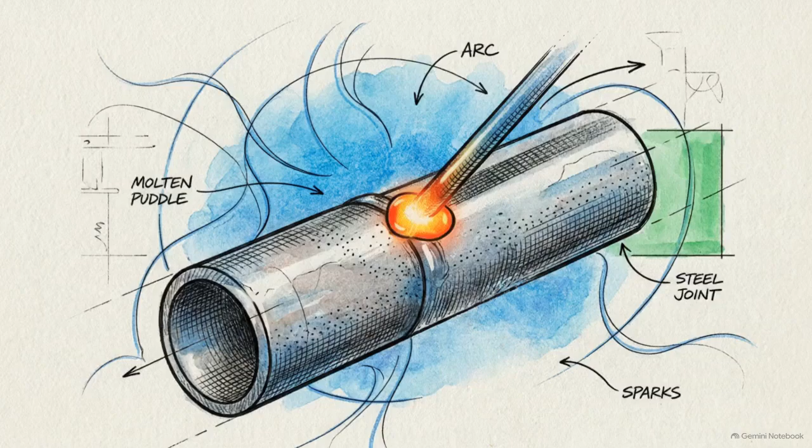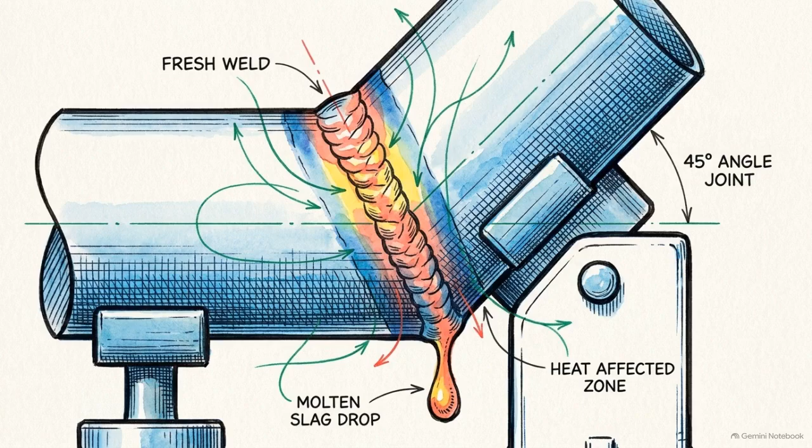In pressure pipe welding, an electric arc reaches temperatures exceeding 6,000 degrees to fuse steel. Maintaining a sound molten puddle against the pull of gravity is the primary test of a welder's skill. To prove this proficiency, welders aim for a specific industry benchmark, passing the 6G qualification test.

Consider a common case study. A welder passes a performance test using the shielded metal arc welding process on a 2-inch Schedule 80 pipe made of ASTM A53 carbon steel, fixed at a 45-degree angle. Once the test is complete, we have to determine exactly what this individual is legally permitted to weld on the production floor under ASME Section 9.

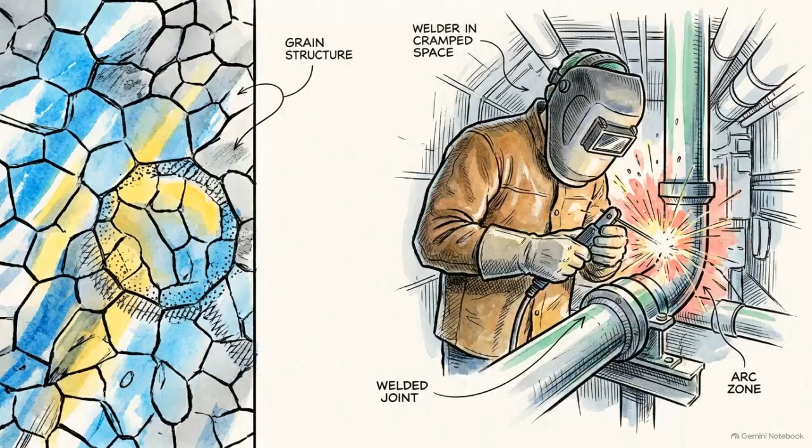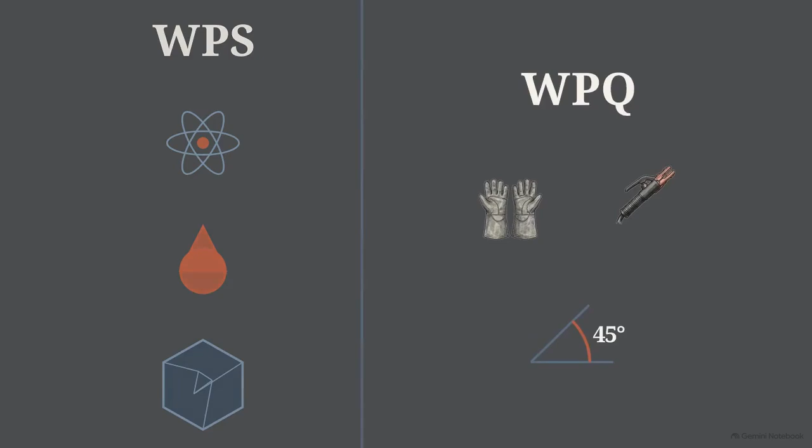This requires a distinction between testing a procedure and testing a person. A welding procedure specification, or WPS, qualifies the chemistry, heat input, and metallurgical viability of the joint. A welder performance qualification, or WPQ, is different. It strictly evaluates the human's physical ability to deposit sound metal within defined geometric constraints.

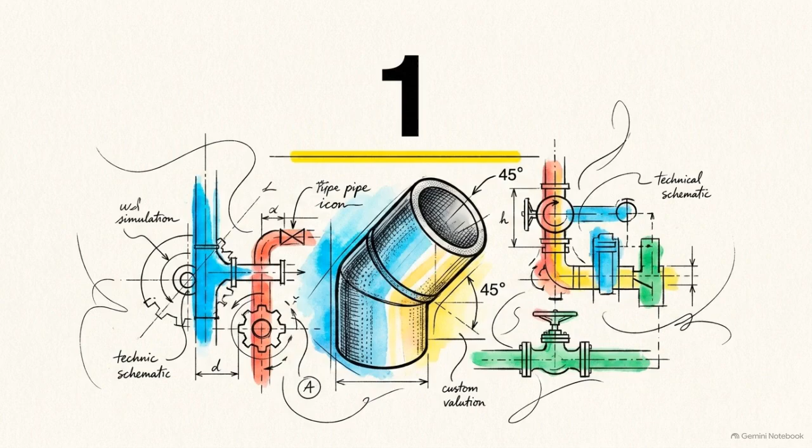Section 9 uses the physical parameters of that single test coupon to calculate a definitive boundary for the welder's production limits. The first parameter to evaluate is the 6G position. This orientation is physically demanding because it requires the welder to transition through flat, vertical, and overhead techniques in a single continuous pass. Paragraph D of the code defines the 6G position as a pipe fixed with its axis inclined at 45 degrees, where the weld is deposited as the welder moves around the circumference.

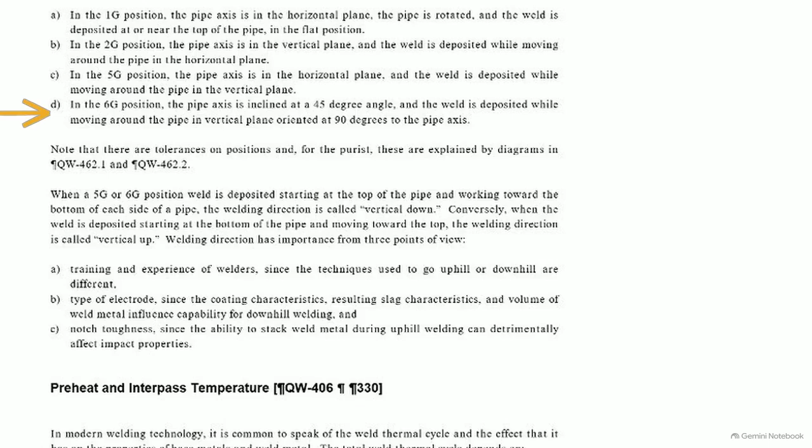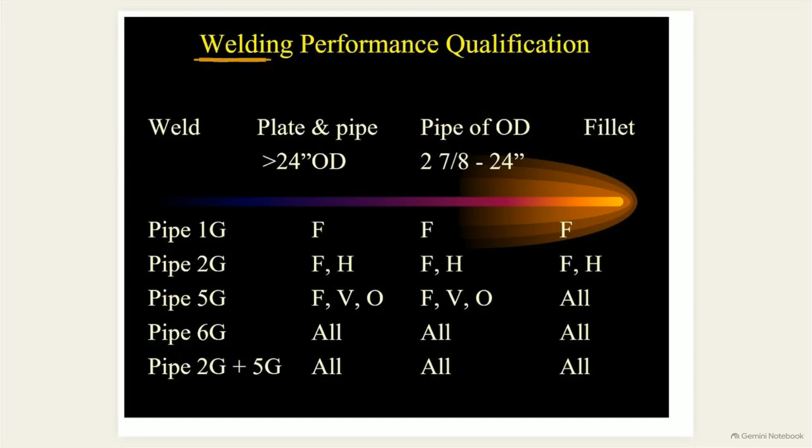Because this is the most difficult orientation to master, the code grants the welder the broadest positional qualification range for passing it. We can find these specific limits in the welder performance qualification table. We'll look at the fourth row labeled Pipe 6G. Note the designations in the subsequent columns.

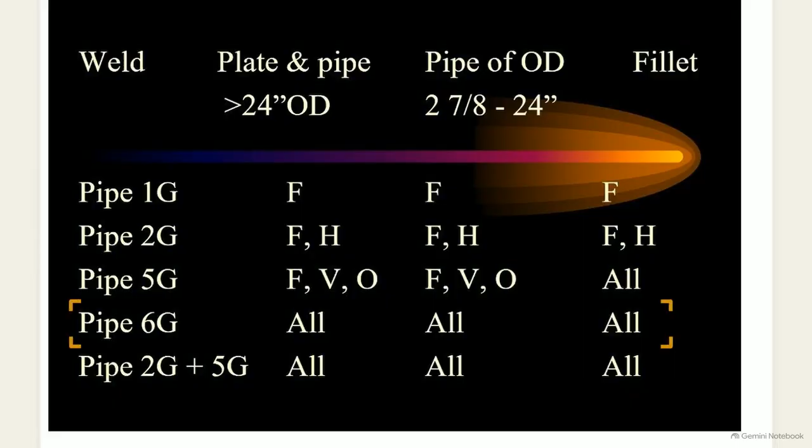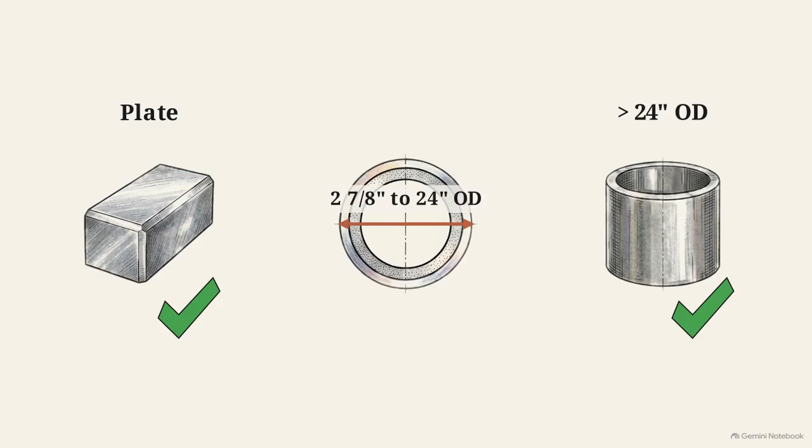Successful completion of this test qualifies the welder for all positions on plate and on pipe with an outer diameter exceeding 24 inches. It also covers all positions for pipe diameters ranging from 2 7/8 inches up to 24 inches. Finally, the qualification extends to all fillet weld positions. Essentially, the 6G test removes positional restrictions for this welder on the production floor.

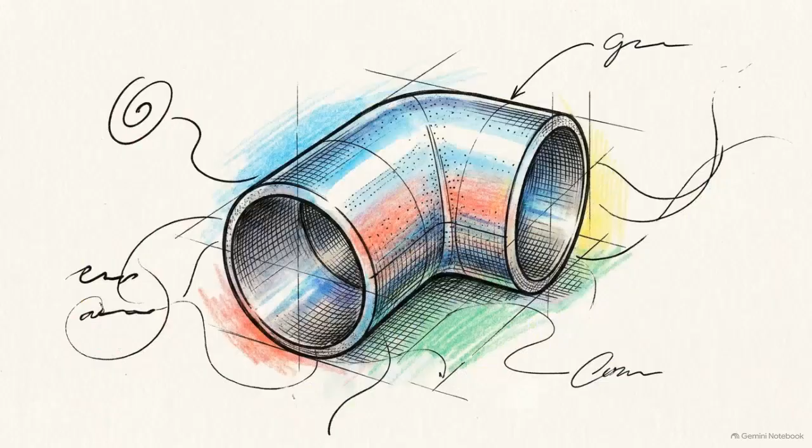Next, we analyze the base metal chemistry of the test coupon. Our example coupon uses ASTM A53, a standard carbon steel. If welders were required to retest for every proprietary alloy on the market, the industry could not function efficiently. To solve this, ASME uses the P-number system, which groups materials with similar weldability and mechanical properties into shared categories. In this list of base metal P-numbers, we can identify where carbon steels like A53 fall.

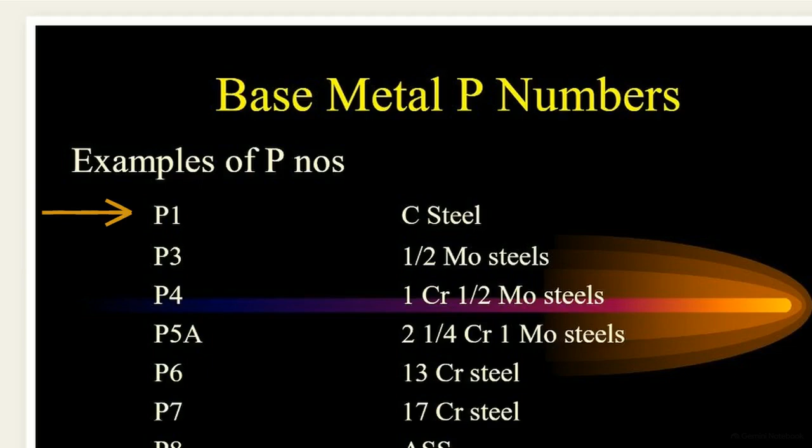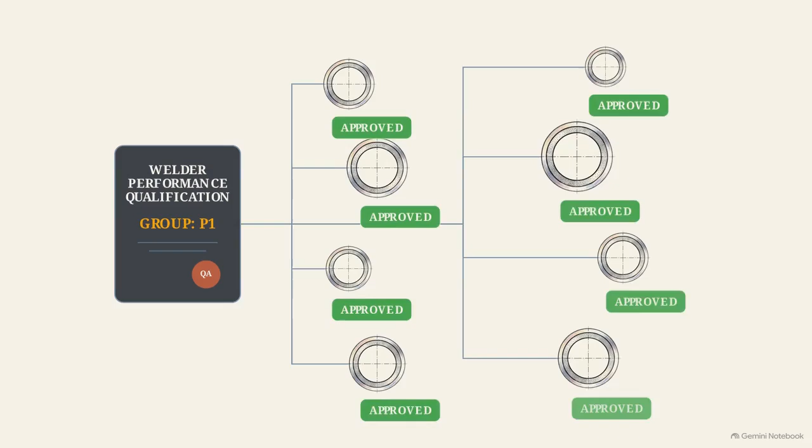Carbon steels are classified as P1 materials. Under performance testing rules, qualifying on one P1 metal allows the welder to work on any production material within the P1 group.

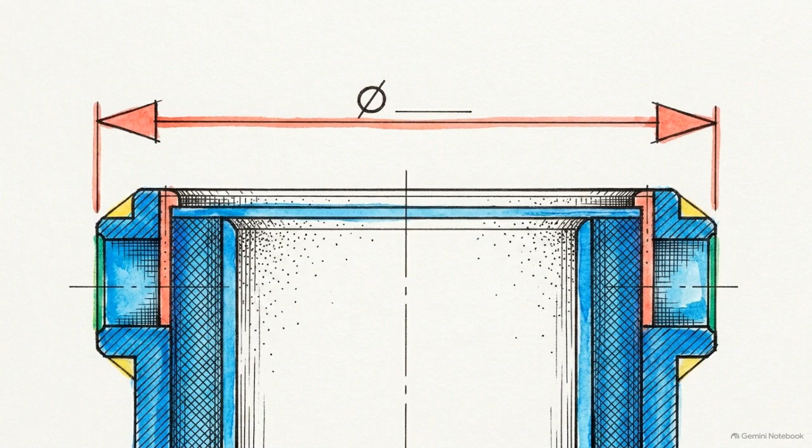This grouping ensures the welder's metallurgical range is fixed to carbon steels without requiring a new test for minor alloy variations. The final two variables are outer diameter and wall thickness. These create the most significant restrictions on the welder's scope of work. The starting diameter for our coupon is 2-inch nominal pipe size. It is important to note that NPS is a naming convention. A 2-inch NPS pipe has an actual outer diameter of 2.375 inches.

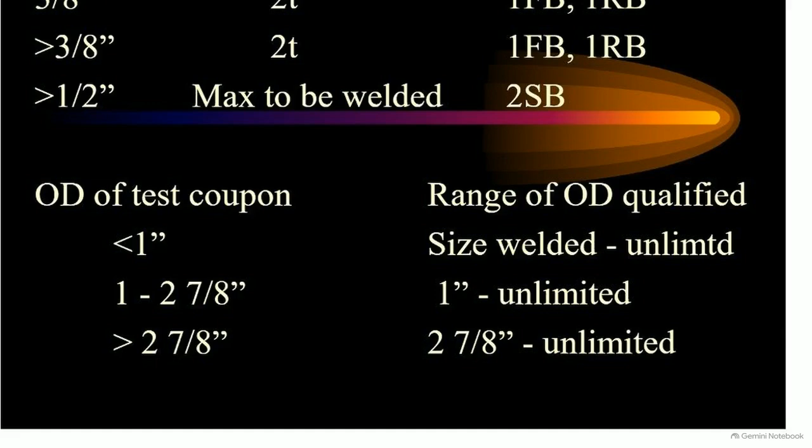We must check the code to see what a 2.375-inch test qualifies for. In the lower section of this qualification table, we find the row for test coupons between 1 inch and 2 7/8 inches. Our pipe fits this tier, qualifying the welder for any production pipe with a minimum diameter of 1 inch up to an unlimited maximum.

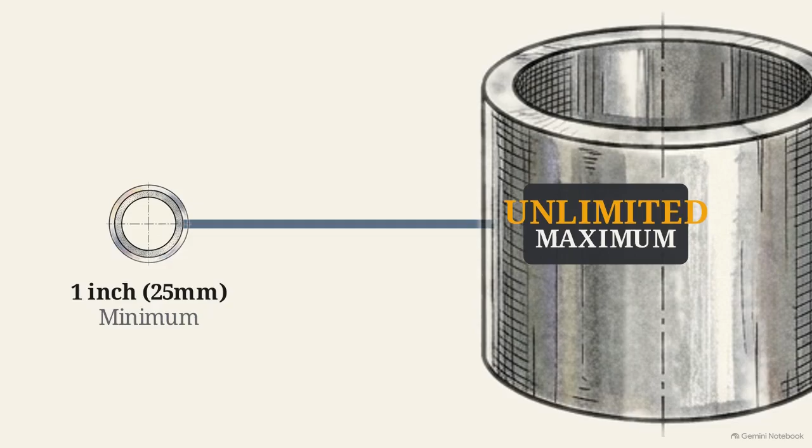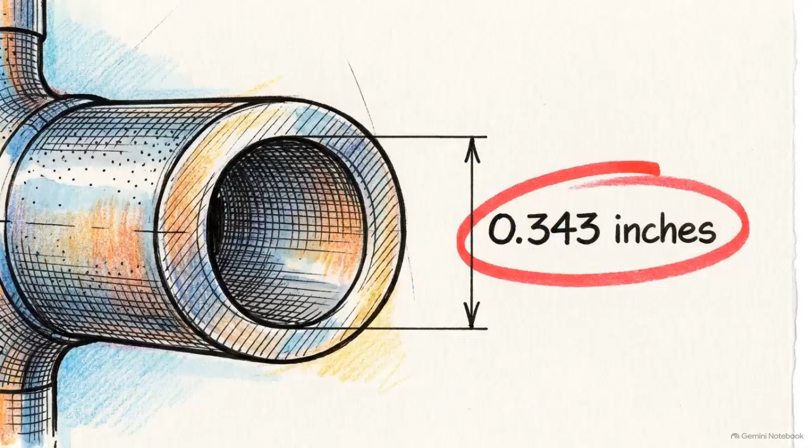Finally, we must calculate the limit for the thickness of the deposited weld metal. A 2-inch Schedule 80 pipe has a wall thickness of 0.343 inches. This measurement determines the welder's thickness bracket. In the top table, the first row applies to coupons under 3/8 of an inch.

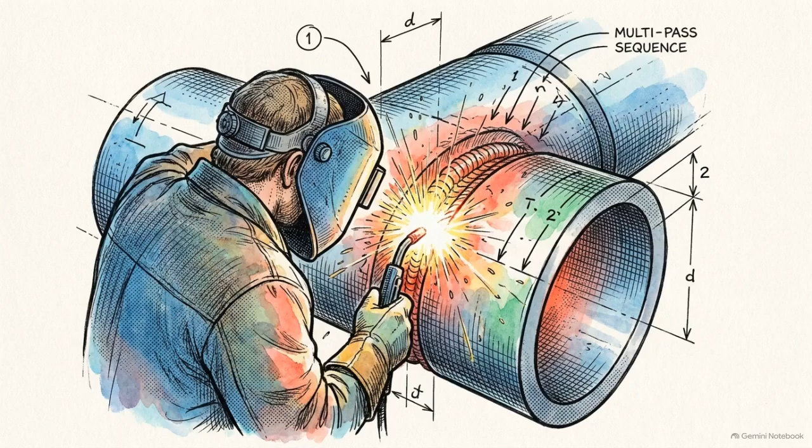Here, the code applies a 2T limit. This rule states that the maximum thickness the welder can deposit in production is limited to twice the thickness of the metal deposited during the test. For a full penetration weld on our 0.343-inch coupon, we multiply the thickness by 2. This results in a hard production limit of 0.686 inches.

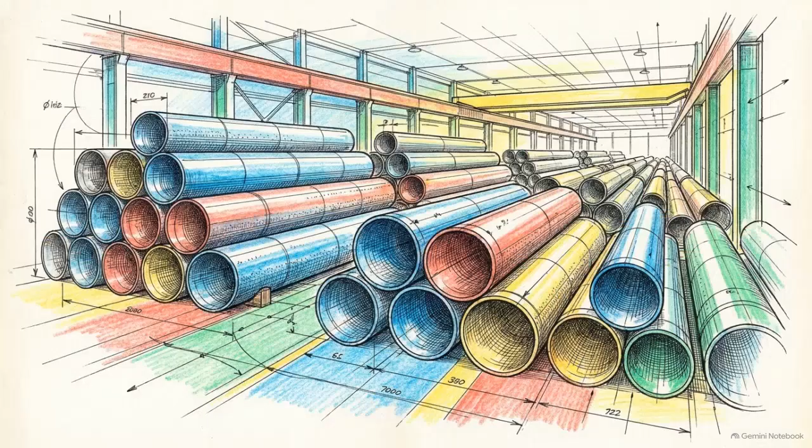While the diameter range is broad, the thin wall of the test coupon creates a mathematical ceiling on the thickness of the joints this welder can legally weld.

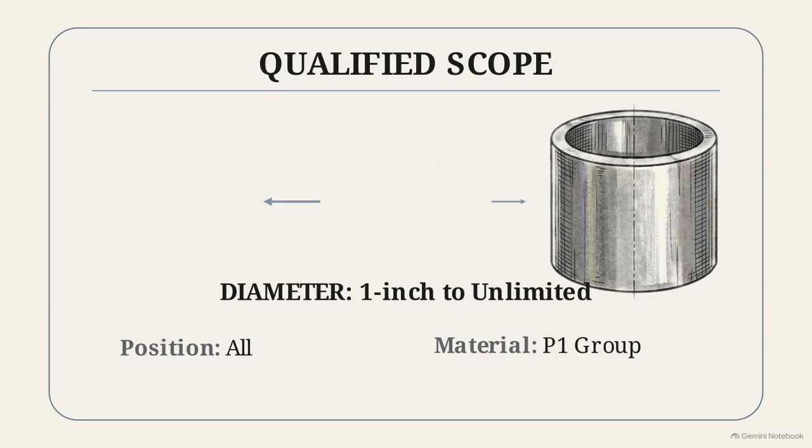By combining these data points, we establish the final operational envelope for this welder. They are qualified for all welding positions on P1 carbon steels. They can weld pipe diameters from 1 inch to unlimited, but are strictly limited to a weld thickness of 0.686 inches. To qualify for unlimited thickness, the test requirements must change.

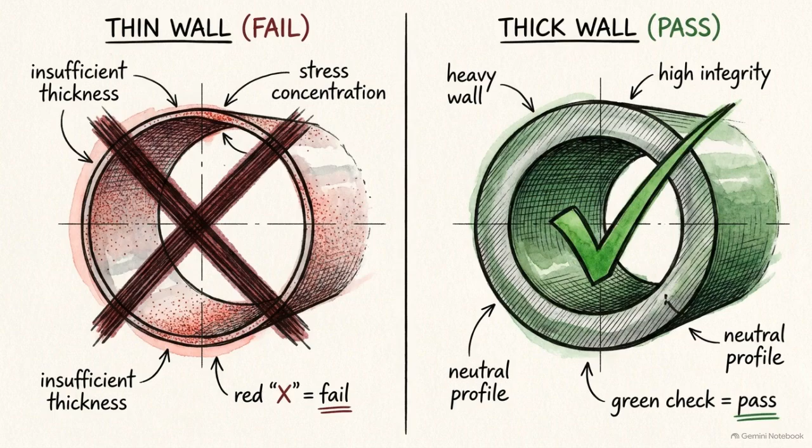Section 9 requires the test coupon to be at least a 1/2 inch thick, using a minimum of 3 weld layers to qualify the welder for unlimited thickness on the production floor.

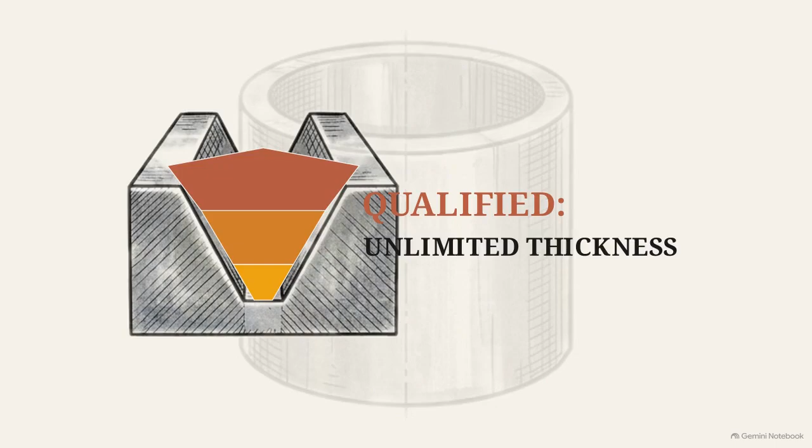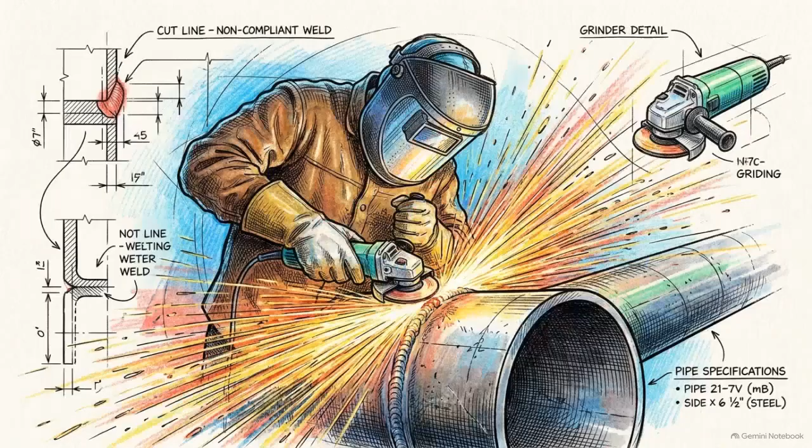The practical implications are significant. If this welder is assigned to a 1-inch thick joint, the work would be out of compliance, even if they hold a 6G certificate. Using a welder outside their qualified range results in mandatory cutouts and significant safety liabilities.

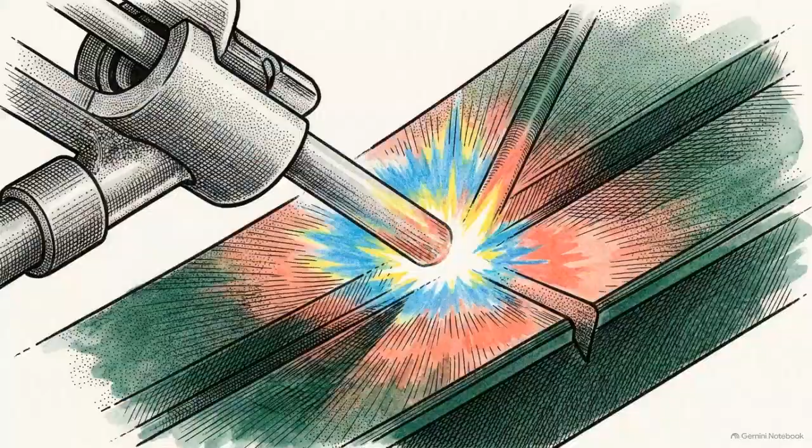The 6G test covers all welding positions, but the actual scope of work is still bound by the physical dimensions of the test coupon. Mastery of the code requires verifying these specific limits before the arc is struck.